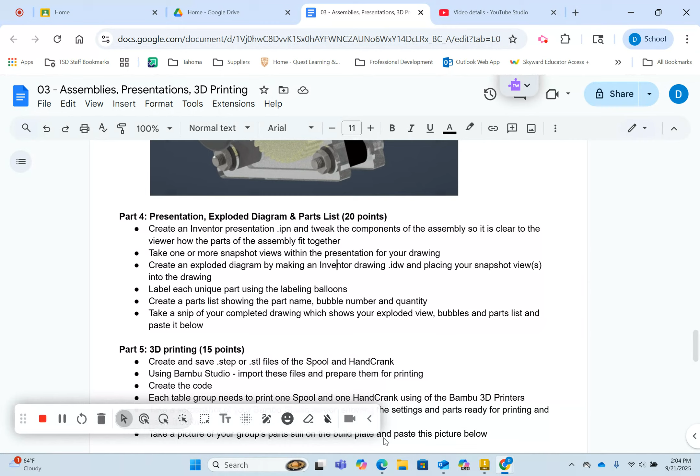In part 4 of the assignment, you're going to create a presentation, and then from that presentation, you're going to create an exploded diagram and parts list. When you're all done, it will look something like this. You can see how things are pulled apart through you do that in the presentation.

This is just the drawing of the presentation where you create bubbles and then a parts list, as you can see here. So from Inventor, you first need your assembly finished and saved, and then we can go File, New, and go to the bottom where you create a standard presentation, and click Create.

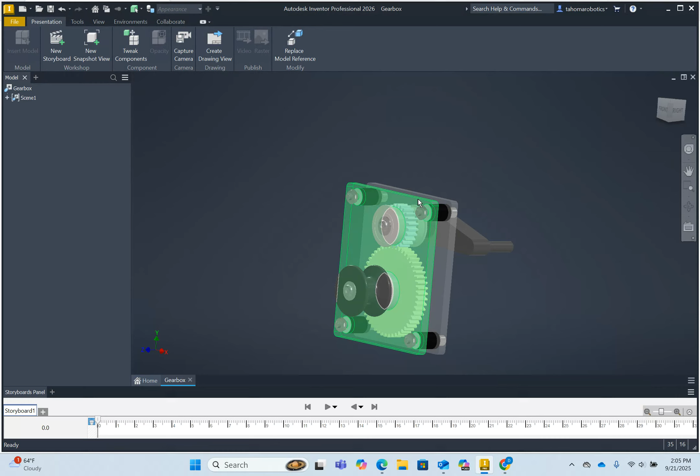And then we need to find the correct file. Mine is in Assignment 3 there, and I'm just going to choose the assembly, the Gearbox assembly, and then open that up. And so now you can see we have the assembly in here.

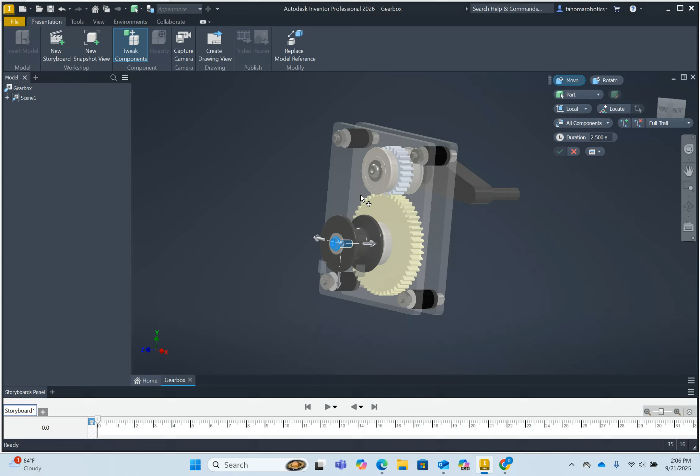And what we're going to do is tweak the components where we can pull them apart. Basically what you can do is you can click on the tweak components, and then you can select different parts to tweak. For example, this button head screw we're going to pull out, and we're going to pull out the washer and the spool and the spacer behind it and the bearing, and stretch them out in such a way that we can see them all.

So someone that was assembling it could follow that picture, that diagram, to put it together. When I click on that, it gives me these three arrows on each of the axes, and also gives me planes that I can select in the directions that I'd like to move. Basically I want to go out. There's no outward button or outward arrow, but there's an inward arrow, and I can click and drag it, or I can type a specific distance.

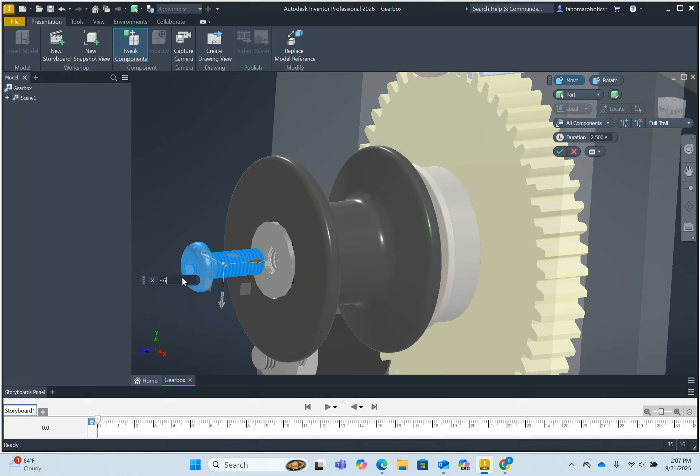And so if you wanted more specific distances, like here it's negative 0.596, maybe I want to go negative 0.6. And then I can hit enter there, and it gives me that pulled out.

Now maybe I want to pull this and the washer out further, so I can go tweak, and if I want to select multiple things, I would just hit control. Now I have an outward arrow, so I can click here, and maybe I want to go a half of an inch.

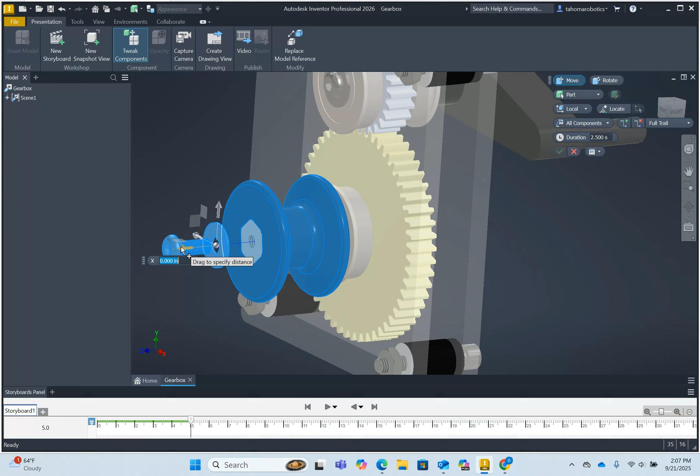Now before I hit enter, I can actually click another piece. I basically just hit a control click, and I can hit an arrow and pull that out an additional. Maybe I can pull it out 3/4 of an inch. I'm just making up these numbers, and you can choose those numbers as you wish.

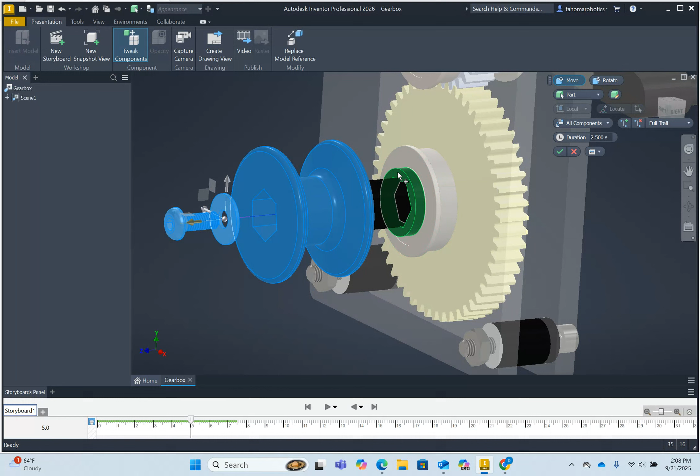But notice it is just continuing to add new parts to a tweak. So now I can control click on the actual spacer here, and just continue to move this out, maybe 0.5 inches. So notice I'm just continuing pulling things out, and they're added onto this tweak, and I'm just control clicking each new part, and then I can move those out.

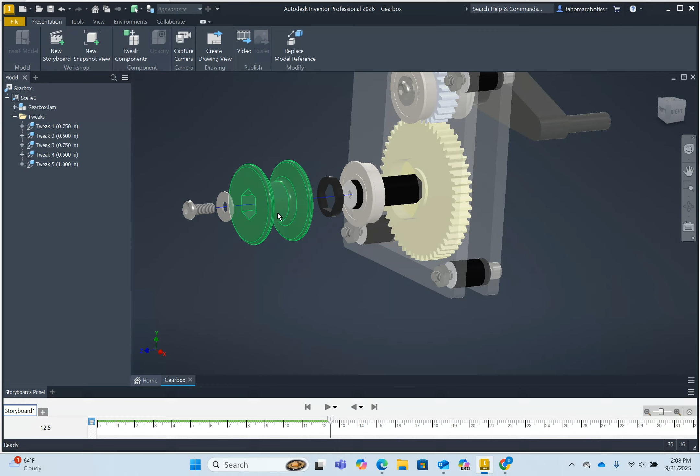And then once I have maybe all of the ones that I want moved out, I can just hit enter. Notice if I hit the plus here, I can see all of the individual tweaks. So if I wanted to change a specific number, maybe I wanted to make that first tweak a different number, I could just change that and edit all of those as I would like.

And so basically I'm stretching these out so a user or someone who looked at the exploded view could see all of the individual parts that were stacked up to make that.

I'm going to create a new tweak basically to pull the nuts, and so I'm going to control select all of the nuts here and hit, actually I hit the wrong button. I need to hit the tweak button, not the snapshot button, so click that. I'm going to go out maybe 2 inches.

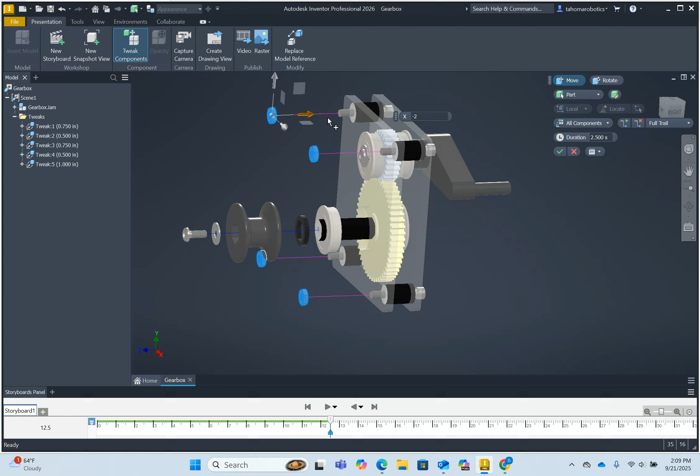Okay, and if you hit enter, it jumps then to a completely new tweak. But if I don't hit enter and just hit control left click another piece, I basically have already tweaked these out or moved these out 2 inches, but now I can move this plate a little bit, and maybe I'll move the plate a half inch, and it continues to move the nuts out that far as well.

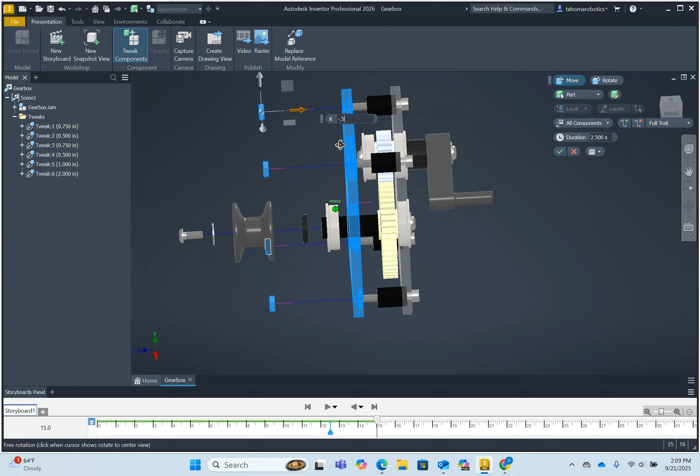I'm going to stop there. I think those are pulled apart enough on that side. Now I'm going to go on the other side. So I'm going to hit enter. Maybe I have to go here and hit enter.

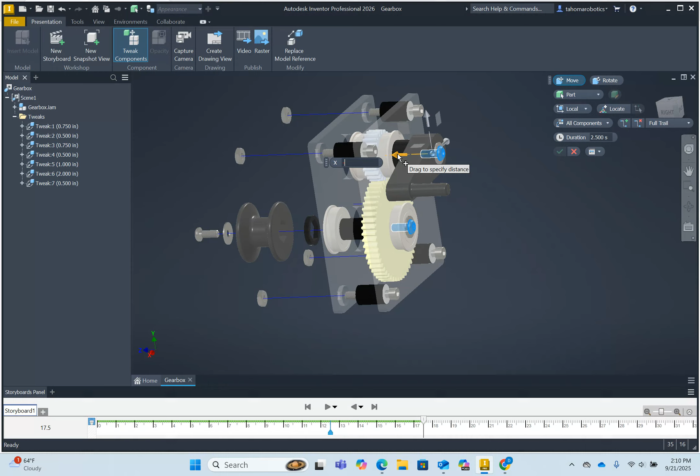Now looking here, I could possibly pull these out. So go tweak components, control left click here, and maybe move those out a 1/2 inch. Again, I'm just going with what maybe I feel comfortable. Since that isn't quite pulled out from the washer, I can go a little bit further.

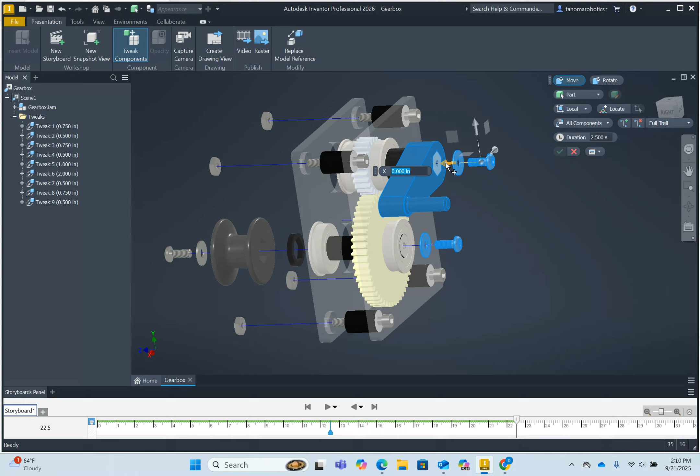Okay, now I can then click the washers and just continue this on. And then maybe I'll pull the handle. And so as you see, you can just continue to add on to those things. And then I'll click on the spacer.

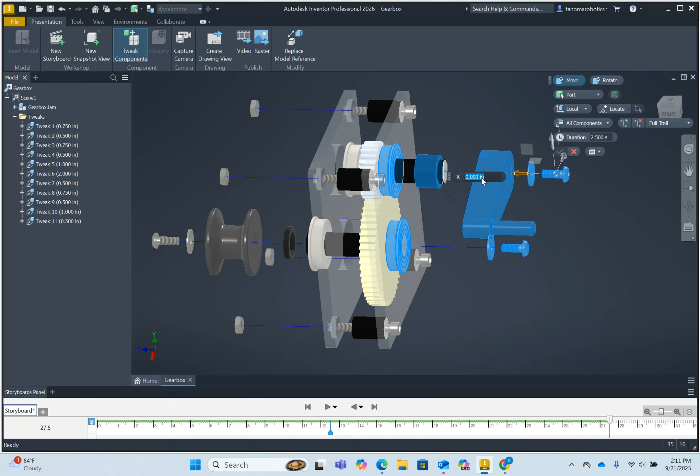And then finally I might pull the bearings out. You can do the tweaks however you would like to. They don't have to be in any particular format, but you basically want to be able to see all of the individual parts as best you can and get them in a position and orientation where someone could understand how they would go together.

Now, other things you can do is tweak things in more than one direction. Let me show you that. So let me select these four. Let's say we wanted to go out 2 inches, but then maybe I wanted to go in a different direction, maybe up a half inch. Okay, so it moves those kind of up and out of the way a little bit, and you can see there are little lines that show where they actually go.

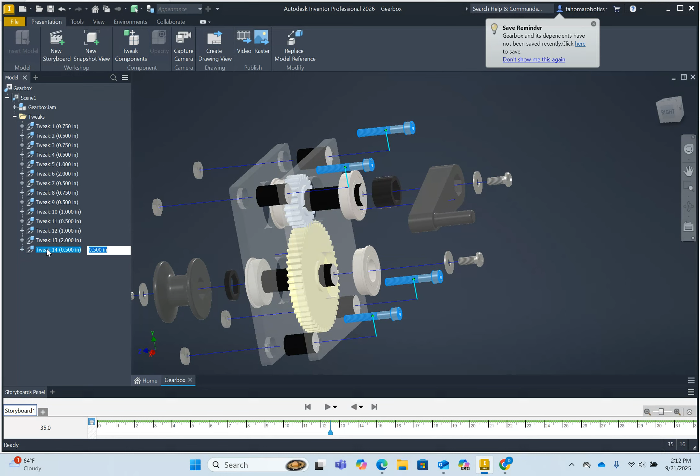And again, if you ever want to edit a tweak and you don't like how it's done, you could go here and actually change and delete one of those tweaks. So this was the straight out 2 inches, and this was the up, and maybe I wanted that to be a different amount, maybe 1 inch instead. So you can always go back and edit a tweak you made or delete a tweak.

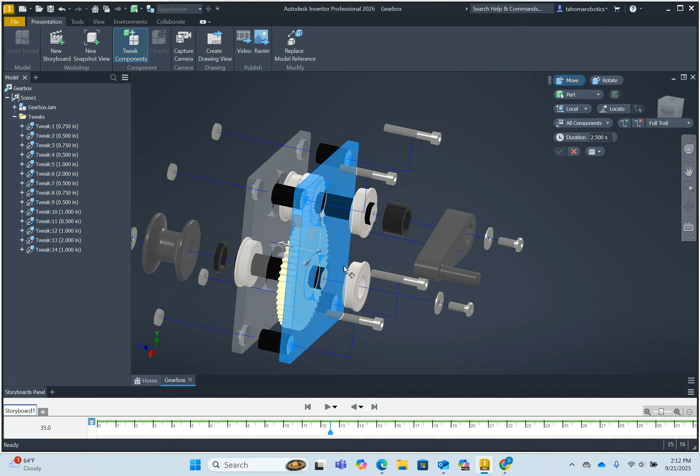Okay, so once things are pulled apart, let me go a little bit further. I'm going to tweak this out maybe an inch, or let's say half inch. And it does look like I need to pull this out as well on this side, so I'm going to take just a minute and do that, and tweak this.

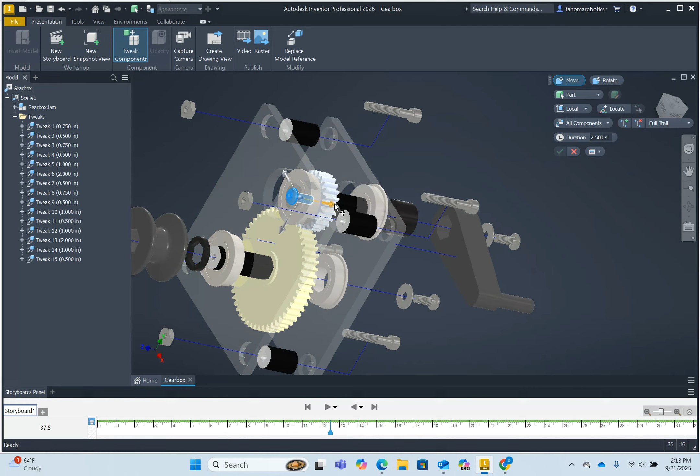It will take a little bit of time to get the hang of how you can do all of these tweaks. But again, you can always go back. You're never stuck with one that you've done and you don't like. You can always undo or delete those, or change them until you're happy.

Since I pulled both plates apart, really the axles, I can pull those and maybe just leave the gears and leave these in their original position, because any user could see where they go. In fact, you may not even need to move the axles. I think a person looking at this could understand where they go and how everything fits together.

So once you have this, you do need to save it. I'm going to give it the same name, Gearbox, but since it has a different extension, .ipn, it will not overwrite the assembly file, which is a .iam file.

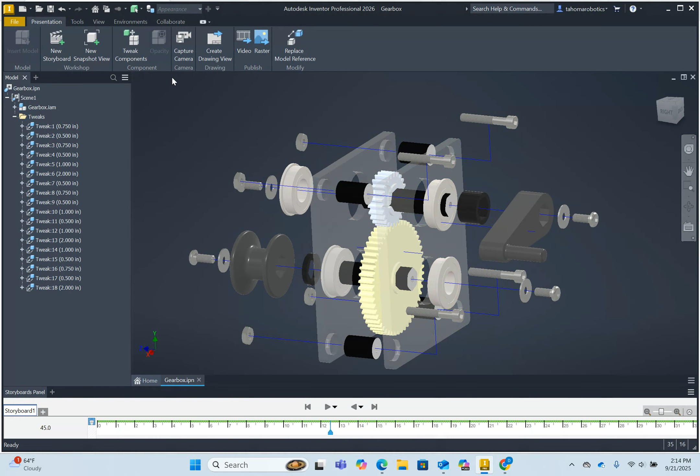Now that that's saved, I'm going to get a view that I like. I'm going to move this around so I can see most of the parts, and then zoom in and get a nice zoom in. One way to do that is to hit this zoom in window and just create a window around what you'd like to zoom in. It gives you a nice zoom feature there.

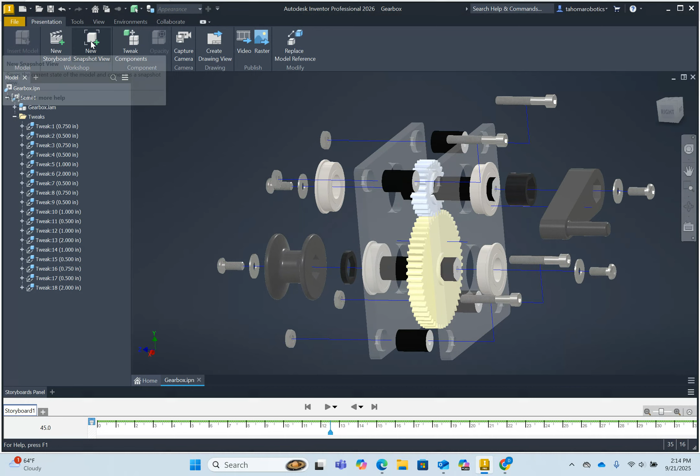Then you can create a new snapshot, and it creates a snapshot that you can use later to put into your drawing. And if you want another view, maybe a view like this, we can create a new snapshot view. And now I'm going to save that.

Then I'm going to create a new drawing, and from that drawing we can actually place in those snapshot views. So I'm going to go File, New, Standard IDW, Create. And then on the base view, I can choose a snapshot view that I've taken.

So you can look at the different snapshot views and choose which one you want. That one I don't want - it looks like I had taken that early, and it doesn't have everything pulled apart because I accidentally clicked on the snapshot view instead of the tweak. But I do like this one.

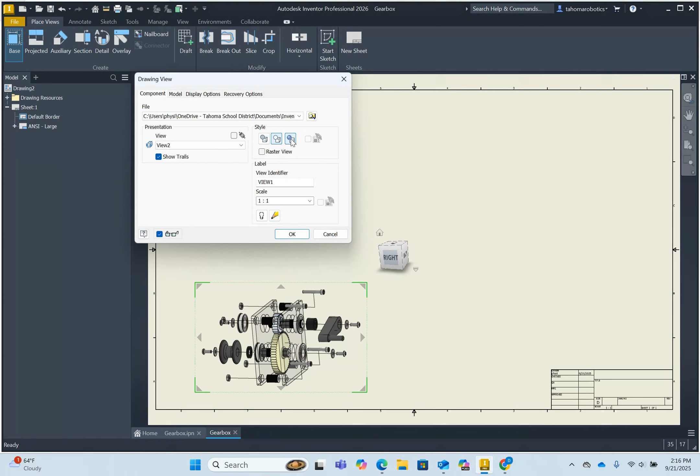And you can change if you want a colored view here, or a shaded view, or a non-shaded view, and then we can change the scale. I'm going to change the scale to make it a little bit larger. 3:1 looks a little too large, maybe 2 or 2.5:1, something like that. Seems reasonable. Then we can go OK.

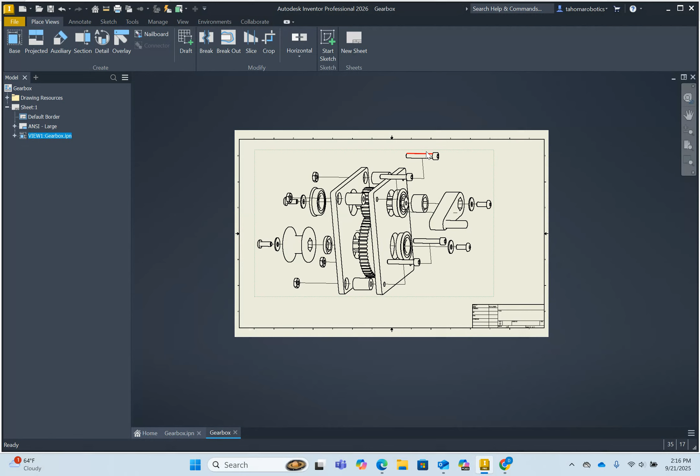It looks like I deselected the shaded view. I think I prefer the shaded view, so I'm going to select that and go OK. Then we can start the next section, which is to label each of these and create a measured drawing and a parts list. I'll do that in the next video.